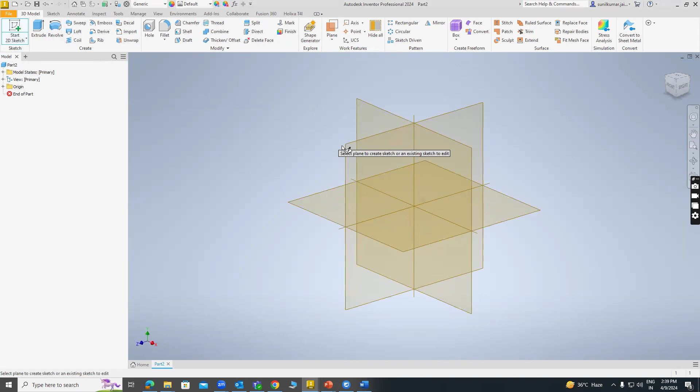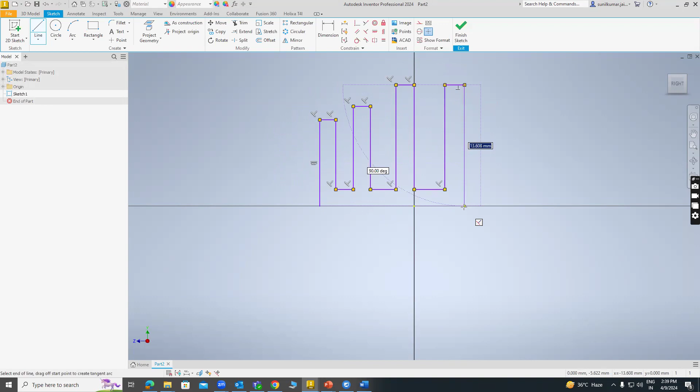As we can see, this is my Inventor Professional 2024 working space, and there is a command called extrude. So first of all, for performing the extrude command, we have to create a 2D sketch. So I am just creating any 2D closed profile like this. And just finish. Hit the finish sketch button, go to the extrude command, select the 2D sketch profile, and it will automatically extrude it by 10 mm.

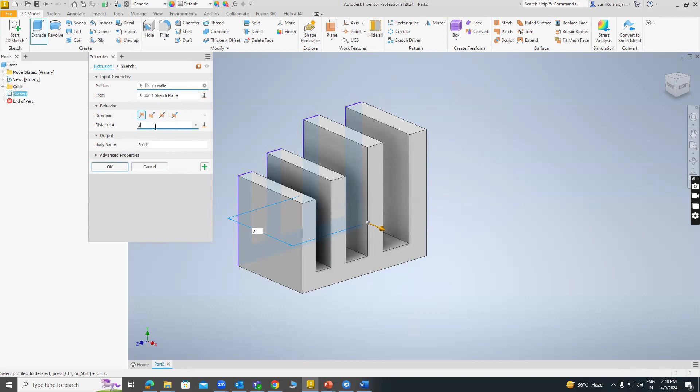If we want to change this dimension, just type here distance A. Suppose I am typing 25 mm. So we can see here the default option is one direction. If we want to flip, then select flip, so the direction will change. And this option is symmetric. Select symmetric, then the thickness will be added in both directions symmetrically. We can see.

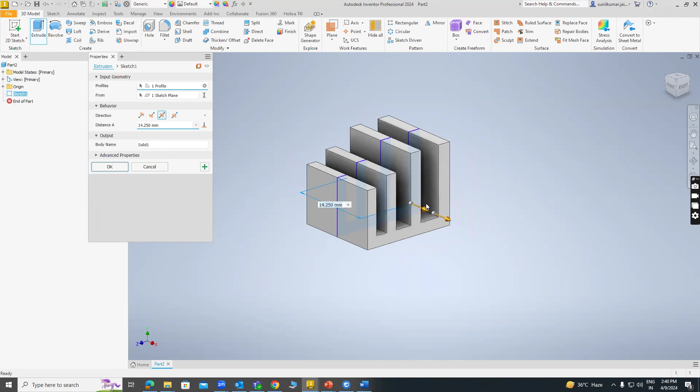And the last option is asymmetric. Now, what is asymmetric? We can put different dimensions in both directions. Like distance A we can put 35 and distance B 50. So you can see it will automatically generate a solid model.

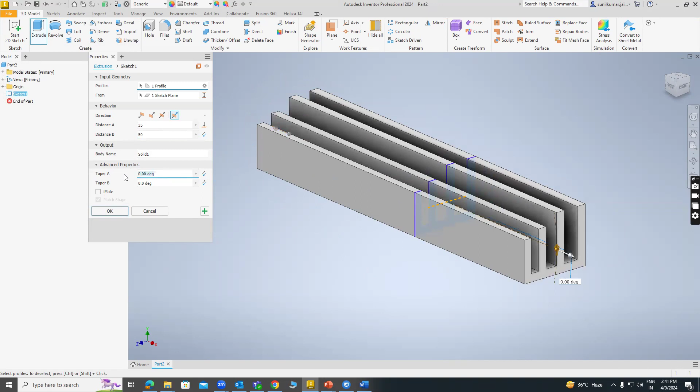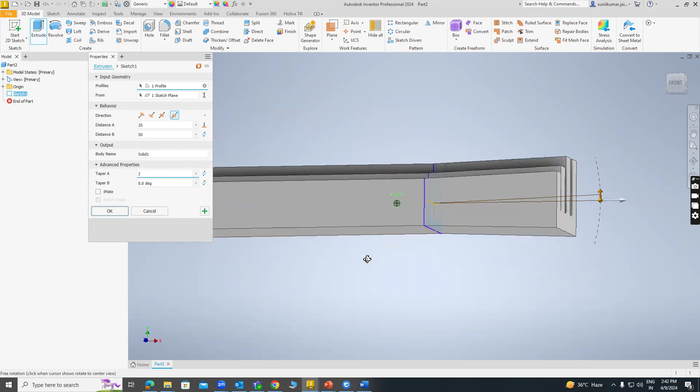And here the advanced property is given, taper A and taper B. We can use taper A. Suppose I am giving a taper angle of 10 degrees, then 10 degrees is very large, so I am giving only 2 degrees. So you can see this material will be added at 35 distance with a 2 degree angle. And taper B, if we want to change the angle to 5, or 3 degrees, then you can see this material is also added at 3 degrees.

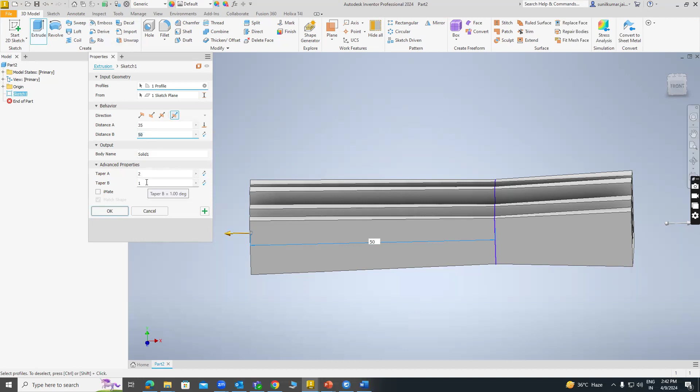1 degree we can see, because after 3 degrees the distance will reduce, because 3 degrees is not applicable to distance 50. If we change the angle, then the distance will not apply for the 50 length. So if we apply 1 degree, then it will apply for the 50 length all through at 1 degree. So you can see this is our basic extrude command.

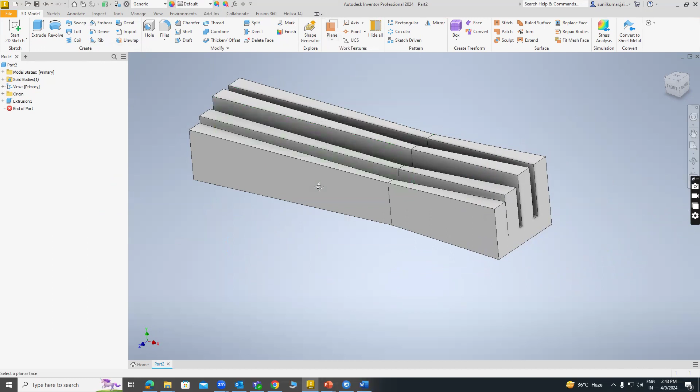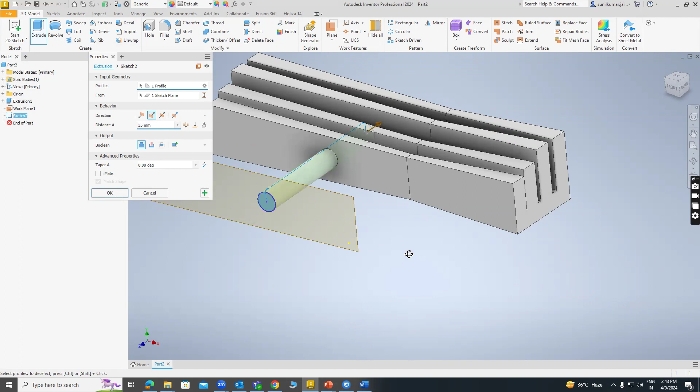Next we have the option plane, offset from plane. If we want to create a new plane, then select this face. And here I am just creating a circle, and extrude. Direction. Okay. So you can see here the option is join. If we select the join option, then it will create a solid cylinder. You can see. If we want to edit, then go to edit feature.

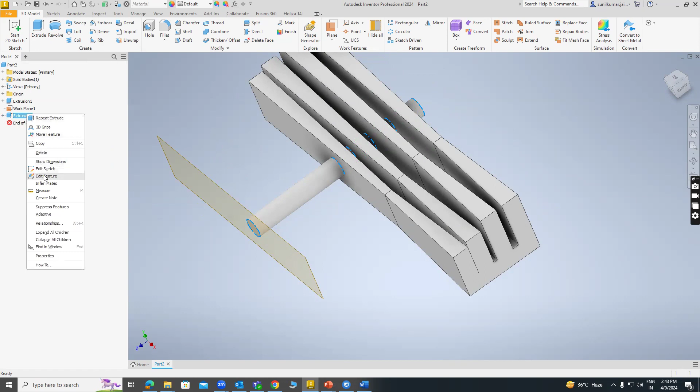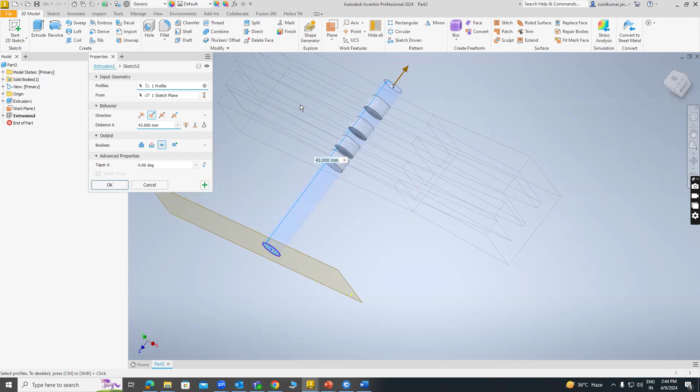And if we select the cut option, then what happens? It will create a through hole. You can see. Also, the third option is intersect. Intersect keeps the part that is common to both components. It will only keep the common part and the remaining part will be removed. If we select intersect, you can see it like this.

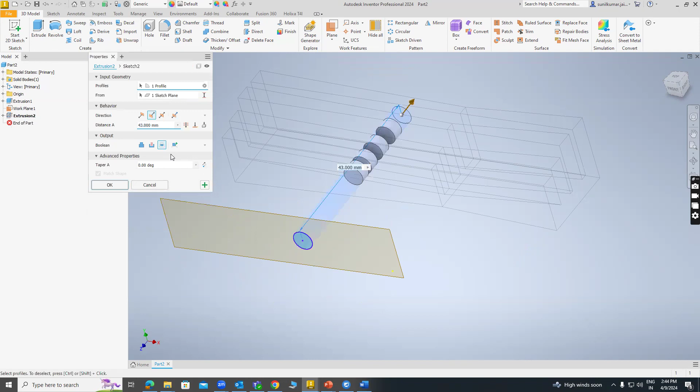And next is the new solid option. If we select new solid, then this cylinder is created as a new solid part. You can select both separately.

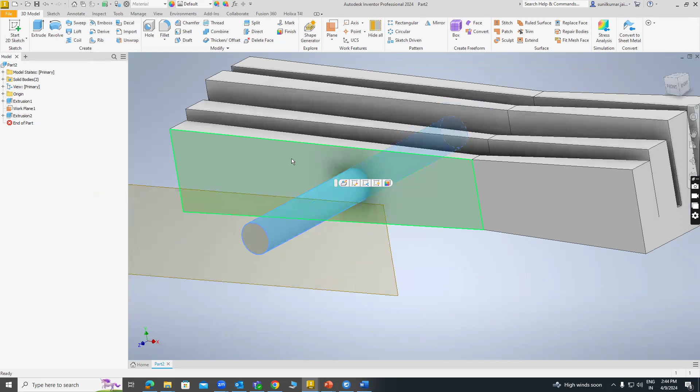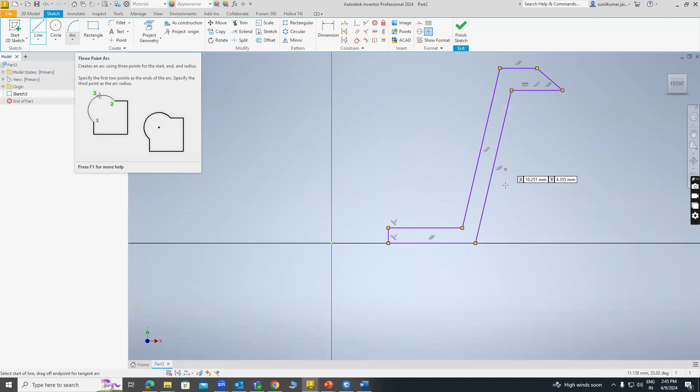So let's go to the next command, the revolve command. For the revolve command, I'm just creating a 2D sketch. Suppose I'm creating a pot through the revolve command. So I'm just creating a front half section for the pot, and create an axis. So we have to select center line. Just click finish sketch and select the revolve command.

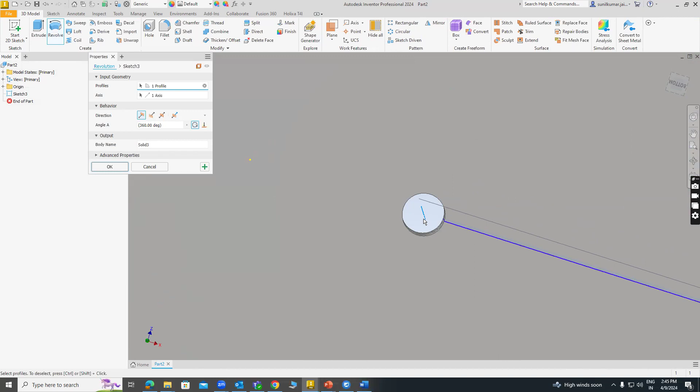So it will automatically add material from 0 to 360 degrees. And you can see a hole will be created because I created the axis at a distance away. So it will automatically generate a hole. So this is our revolve command. Both are the base of any 3D product.